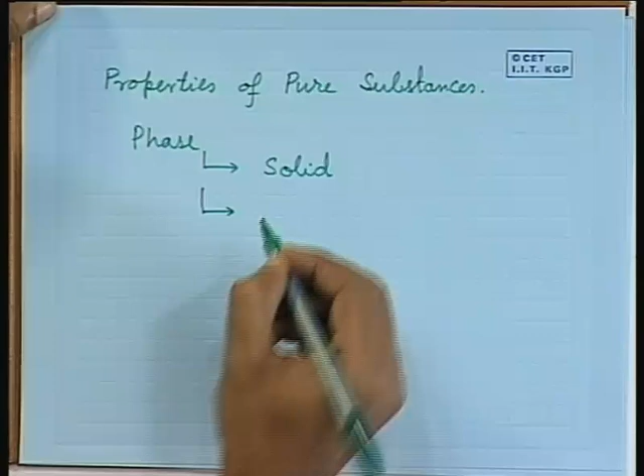it can be solid, it can be in liquid phase, it can be either in vapor or in gas phase. There is a subtle difference between vapor and gas phase, which we will know when we discuss further.

Now, out of this, particularly when we see the different engineering systems of our interest, we will find the working medium could be either in the liquid phase or in the vapor phase or gas phase, or it could be a mixture of liquid and vapor phase.

So, in engineering thermodynamics, or the branch of engineering thermodynamics which we are studying, we will be concerned with determining the thermodynamic properties of liquids, vapors and gases, and of course, the mixture of liquid and vapor.

There could be some properties of solid materials which are also thermodynamic properties, but we are not interested in that. Generally metallurgists or physicists discuss those properties. That is not within the discussion of the present course.

Now, let us take one example. Let us say we take certain vapor in a piston cylinder arrangement,

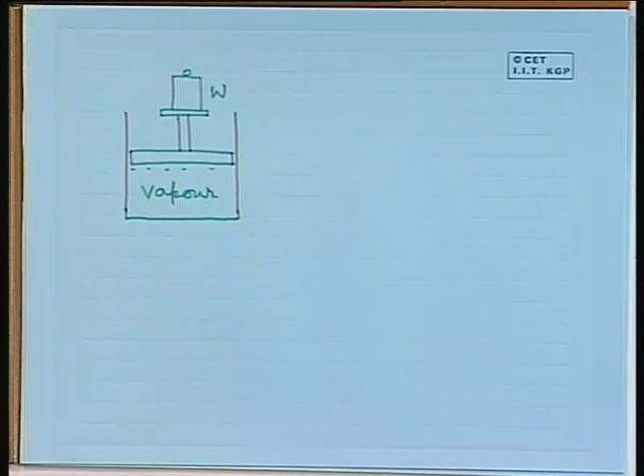Now, we are transferring heat to this vapor at a slow rate, so that at any instant the temperature of the vapor mass anywhere inside this piston cylinder arrangement is uniform and constant, but it is changing with time. That means, as we supply more and more heat, the temperature of the vapor mass as a whole is changing, but it is not changing from point to point.

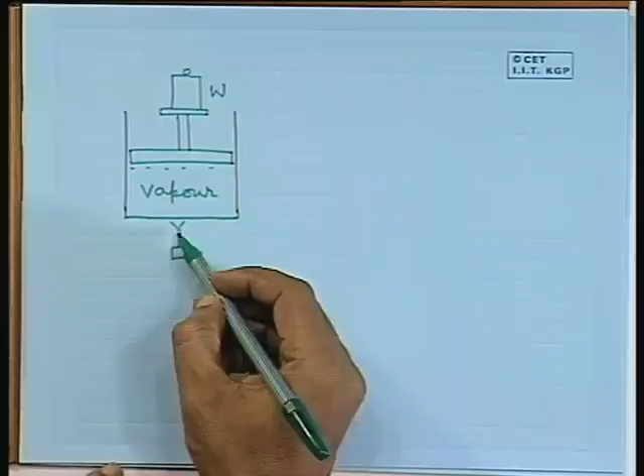Now, if we do this experiment and try to measure its different properties, what will we find? Obviously, if we transfer heat and there is expansion of this vapor mass, there will be change in volume. But we are applying a constant weight on the piston, so the pressure remains constant. So it is a constant pressure process, the volume changes and there could be change in temperature.

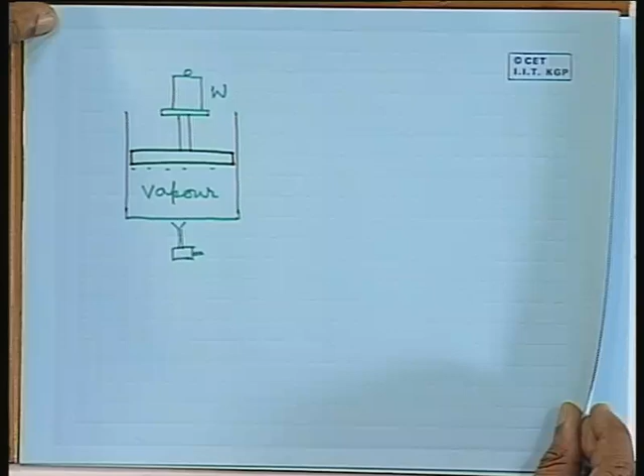Now, if we note down the change of volume, one can find out the change in volume with the application of heat. Similarly, one can think of a process

in which we are plotting the change of volume. Either we can think of specific volume or total volume, and on this side we have got pressure. So we can think of the change of pressure and volume while the temperature is kept constant. So the process will be something like this.

Let us say we are going for a cooling process. So the process will be something like this. Here what we have done, we have kept the temperature constant.

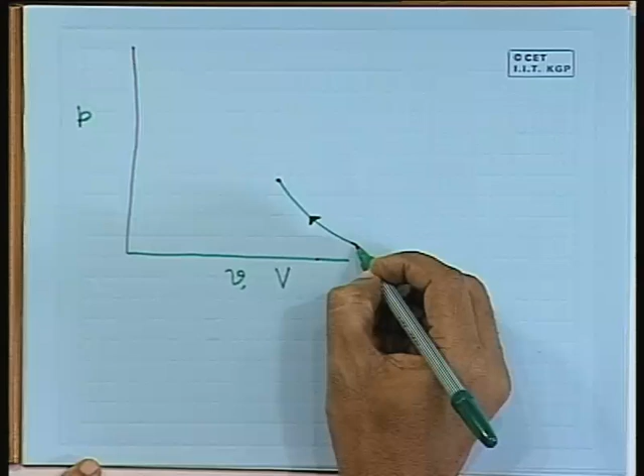At this point, let us say we are coming to the saturated state of the vapor. So we have started at any arbitrary pressure and volume and temperature of a vapor, then we are cooling it, that means extracting heat from the vapor mass, keeping the temperature constant, and then we are plotting the pressure and volume at different stages. So at one stage we will reach the saturated vapor condition.

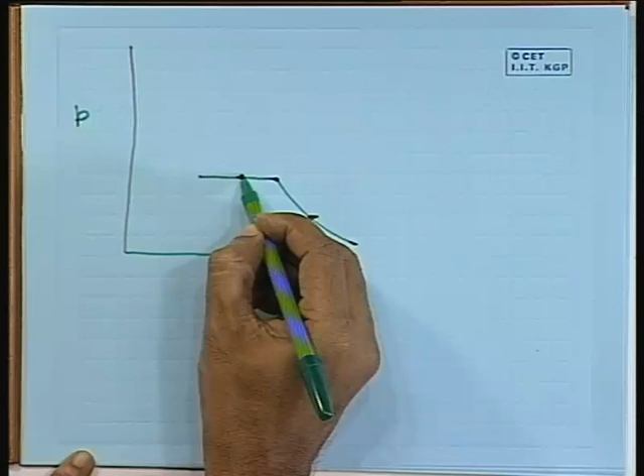After that, if we extract more heat, we will find that temperature will remain constant and pressure will also remain constant till this saturated vapor completely gets converted into saturated liquid. So at this point we are getting saturated liquid.

After this, if we extract more heat, we will find there is rise in pressure, but during this process there is very less change in volume. So obviously here we are having a liquid state, and in the liquid state we know it is almost incompressible. So the change in volume will be small.

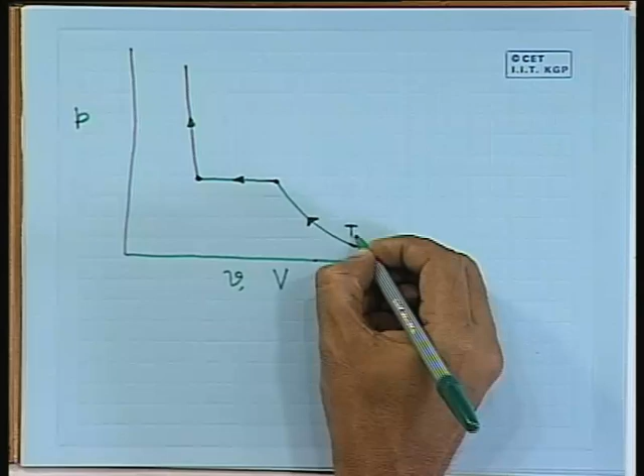So let us say this is at a temperature T1. We can repeat this process for another temperature and we will get something like this.

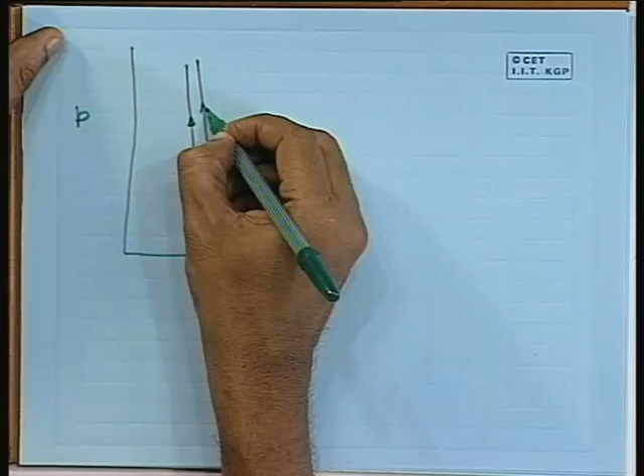So, that means we are getting basically three regions of the curve. In this region we are getting superheated vapor. This is the saturated vapor point. Here we are getting vapor liquid mixture. This is the saturated liquid point, and here we call it subcooled liquid. So this is liquid, this is vapor, and in between we have a zone where mixture of liquid and vapor exists.

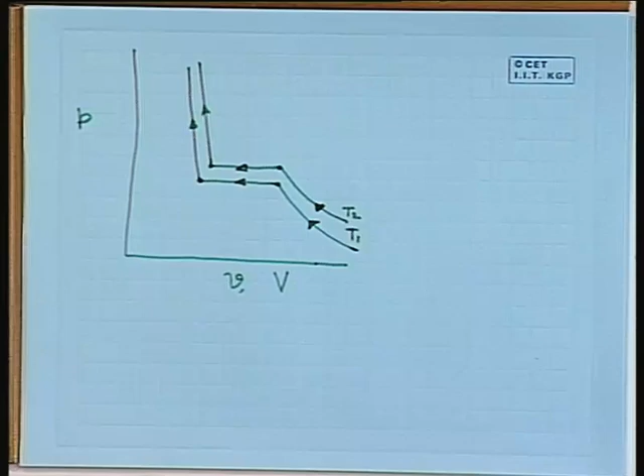Now, if we do this experiment for different temperatures, then we will have different points for saturated vapor. Similarly, we will have different points for saturated liquid. Now, if we combine all these points by some sort of a smooth curve, then you will get some sort of a dome like this.

Let us say this is the line which passes through points of all the saturated vapor, and this is the line which passes through all the points of saturated liquid. If they are extended, they will join at a particular point which is known as critical point. So this point let me denote as C.

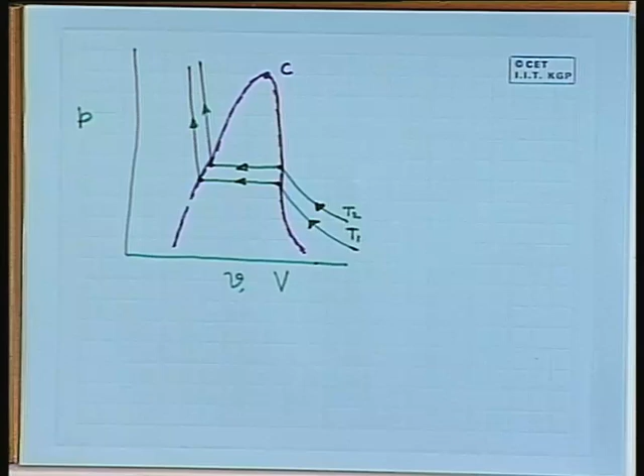or critical point. Now, if somebody does the same experiment or same type of curves are plotted, then through the critical point one will get a curve like this. And beyond critical point, the nature of the curve will be something like this.

So let me write down. This side we are having liquid, which is denoted by L. Inside the dome we are having liquid plus vapor, and this side we are having vapor. So L denotes liquid and V denotes vapor.

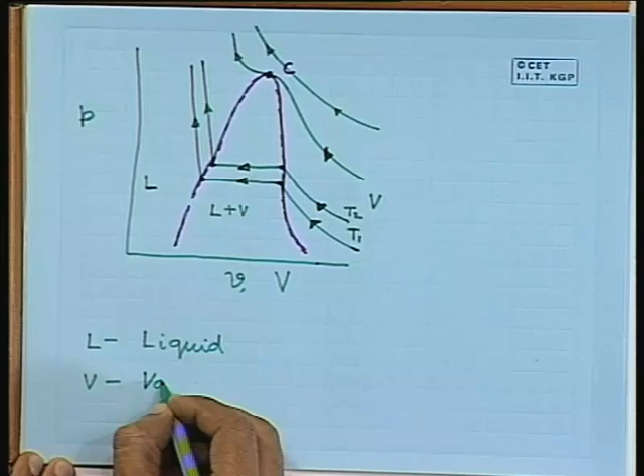These two, that means if we have the dome, on the left hand side of the dome and on the right hand side of the dome, we have got single phase regions, while inside the dome we have got a two phase region or mixture of two phases.

Now, for a pure substance, if it is in single phase, then if we know two independent thermodynamic properties, any third property can be determined.

All right. So in this region, or in the vapor region, if we know two independent thermodynamic properties, let us say if we know pressure and temperature, we can determine volume, we can determine enthalpy, we can determine entropy, or any other properties for that matter. Similarly, in the liquid region, if say pressure and temperature are known, other thermodynamic properties can be determined.

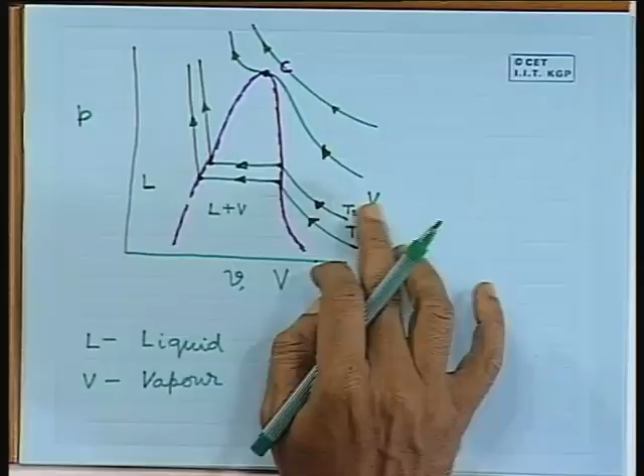Well, in the two phase region, we need any two independent properties for determining another thermodynamic property. So now we will see how to determine the thermodynamic properties and what are the important thermodynamic properties.

So mainly our working substance will be either in the gaseous phase or vapor phase, or it will be in the liquid phase, or it will be a mixture of liquid and vapor. And common working medium with which our engineering systems or engineering cycles run are like steam, it can be a refrigerant. So basically steam is used in a number of engineering cycles, and it is a medium which is extensively used for the production of power.

So we will study the properties of pure substance with reference to properties of steam. So for steam, the diagram which I have shown you is known as the PV diagram for steam. This is the PV diagram.

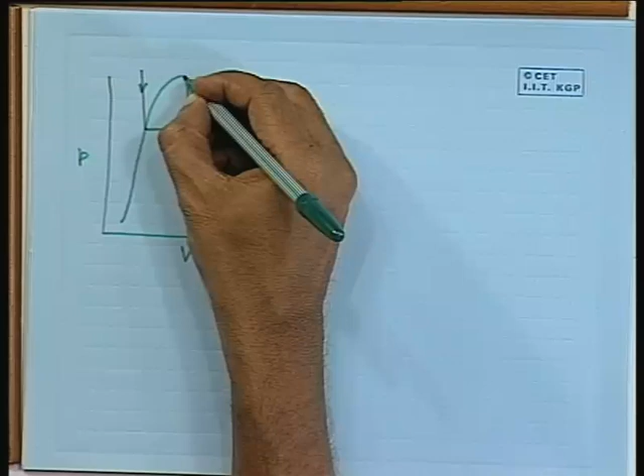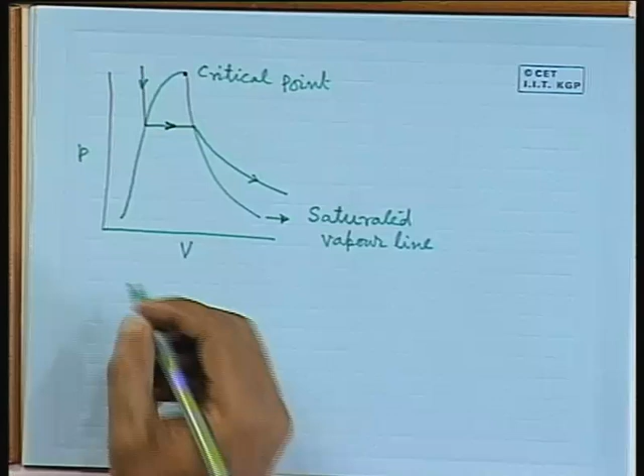So here these are constant temperature lines. So this is a constant temperature heating line. Earlier I have shown a constant temperature cooling line. This point is known as critical point. This line is known as the saturated vapor line, and this line is known as the saturated liquid line.

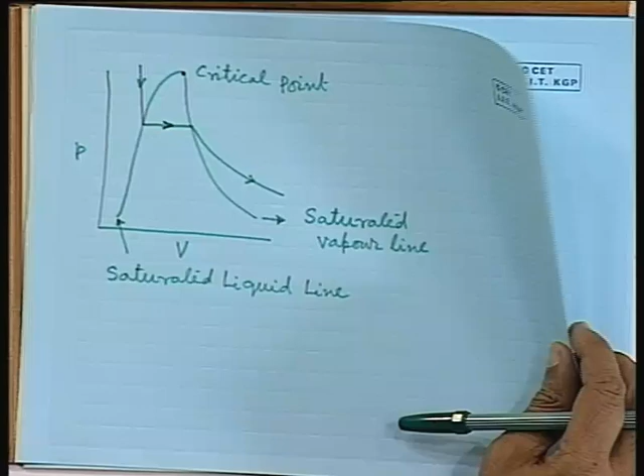Similarly, one can have another thermodynamic plane for representing the pure substance. This is a TS plane, or temperature entropy plane.

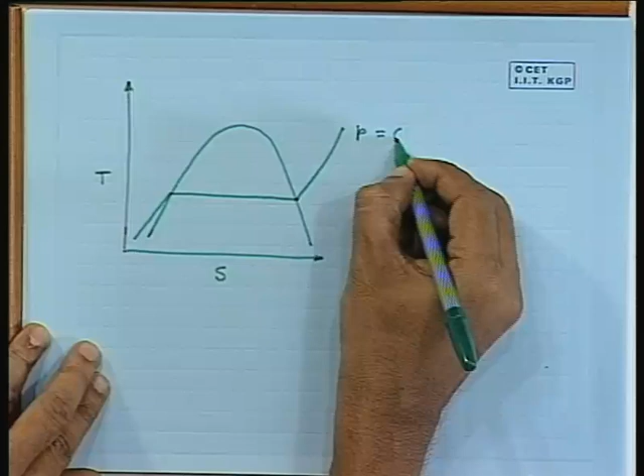In this temperature entropy plane, we can have constant pressure lines like this. So this is a constant pressure line, so we can call it P is equal to constant. Another line we can have, let us say this is P1 is constant, where P1 is greater than P.

Here also we are having the critical point here at the top of the dome. C is the critical point.

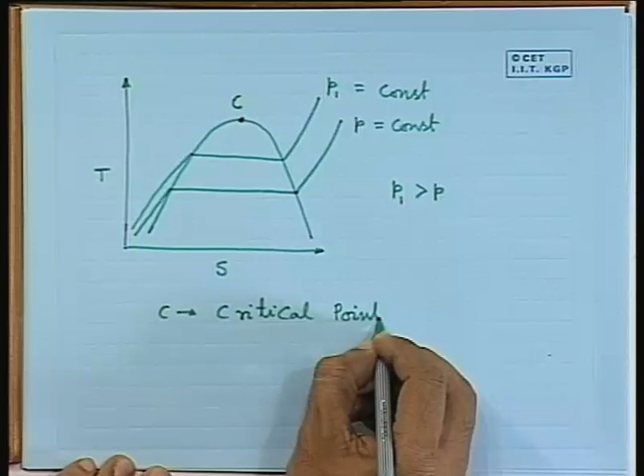Then if I have these two lines, A to C, or line AC, this is the saturated liquid line, and BC is the saturated vapor line.

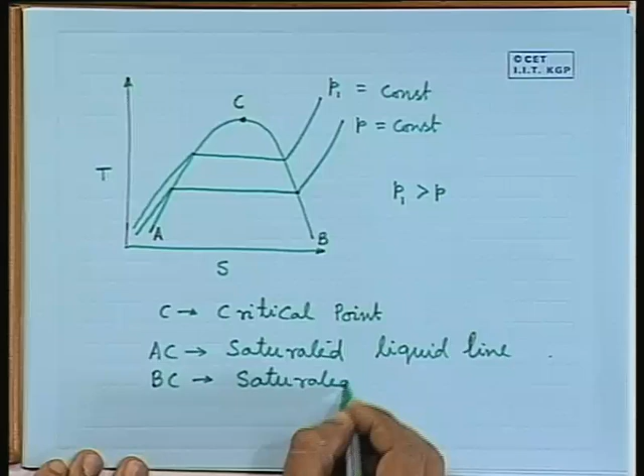Again, here we can see a dome type structure within which there is both liquid plus vapor. On the left hand side of the dome we have got liquid, and on the right hand side of the dome we have got vapor.

At the critical point, one cannot make any demarcation between the liquid phase and the vapor phase, and at the top of the critical point we have got gaseous phase of the matter. So this holds good for both PV diagram and for the TS diagram. That means, at the critical point we do not have any demarcation between liquid phase and vapor phase, and above the critical point we have got gaseous phase.

As mentioned, for any pure substance in a single phase, we need two independent properties for determining the third property or any other thermodynamic property. Inside this dome we have a mixture. Though it is a pure substance, here two different phases exist together, liquid and vapor. So here we need one additional piece of information for determining the property values. That information is known as quality or dryness fraction.

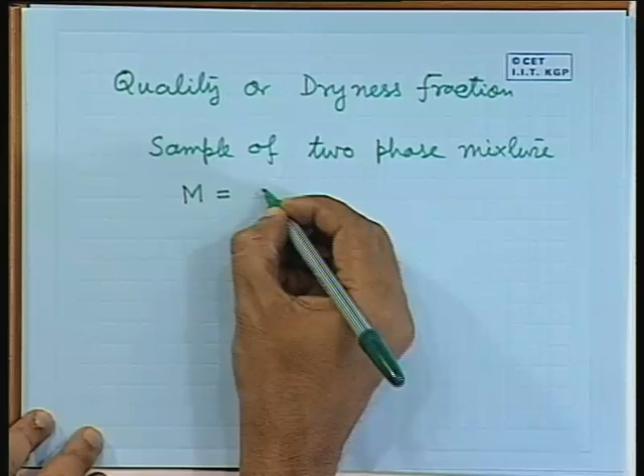Let us take a sample of a two phase mixture. The mass of the sample is m. As it is a mixture of two phases, it is made up partly of liquid and partly of vapor. Conventionally, liquid is expressed with a subscript f and vapor is denoted with a subscript g. So m total equals mf plus mg.

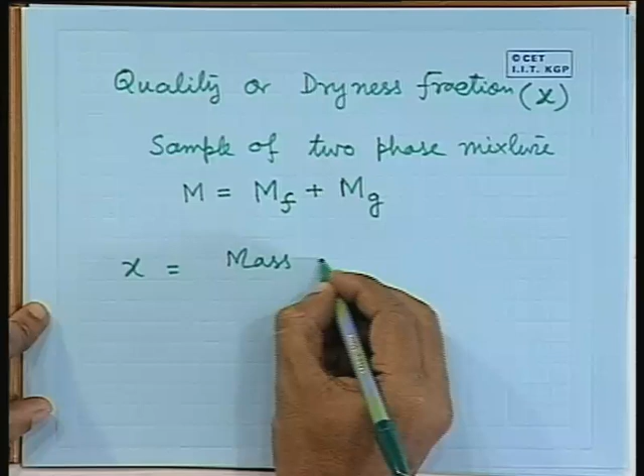Now, quality or dryness fraction is denoted as x. So x is mass of vapor divided by mass of the sample. In this case, it will be mg by m, or mg by mf plus mg.

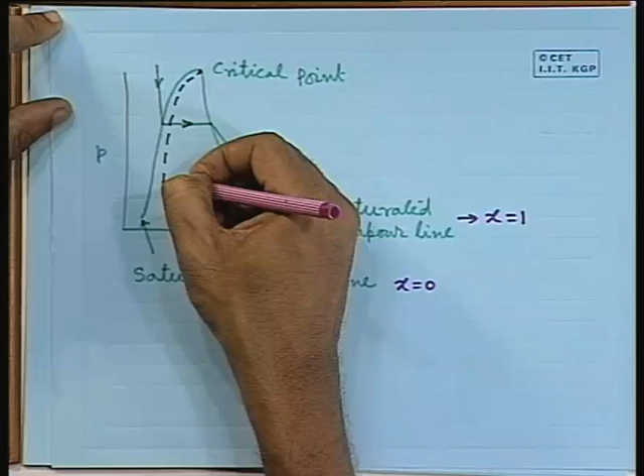This quality or dryness fraction will be used as another property inside the two phase dome. If we go back to our earlier diagram, at the saturated vapor line x is equal to 1, at the saturated liquid line x is equal to 0, and in between values of x lie between these two lines. In other words, we will have different curves for different values of x inside the dome. These are constant x values or constant x lines, so we can write x is equal to constant.

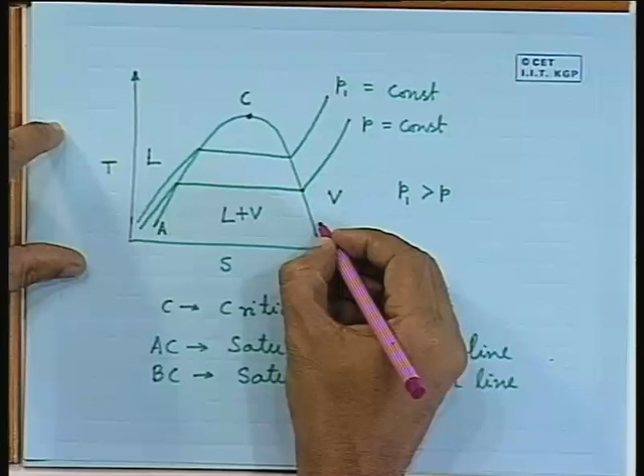A similar thing exists on this TS diagram. X is equal to 1 here, x is equal to 0 here, and in between there are a number of lines. Let us say this is one typical line where x is equal to constant.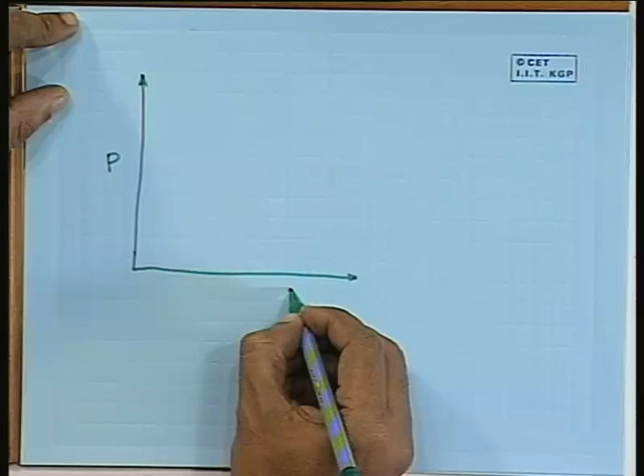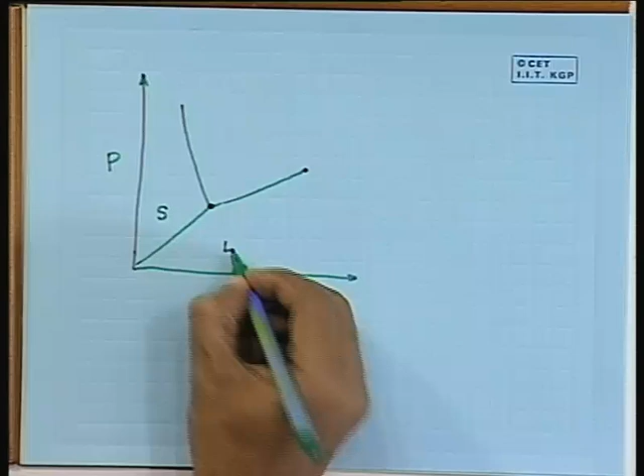Though, as mentioned at the beginning, we are not much concerned with the properties of solids, let us see the total scenario on a PT diagram, pressure temperature diagram. This is a PT plane for any thermodynamic substance. Transformation of phases can be denoted by lines like this. This side we will have solid, this is liquid, this is vapor, and this is gas. This is extended, so if we give different names, this point is C and this is Tp.

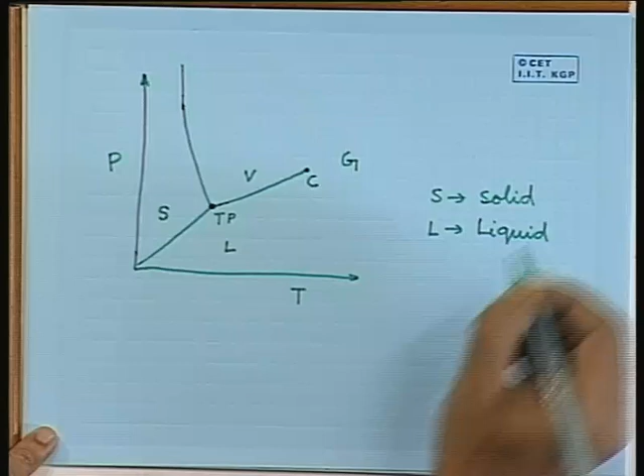S denotes solid, L denotes liquid, V denotes vapor, and G denotes gas. C denotes critical point. Tp denotes triple point.

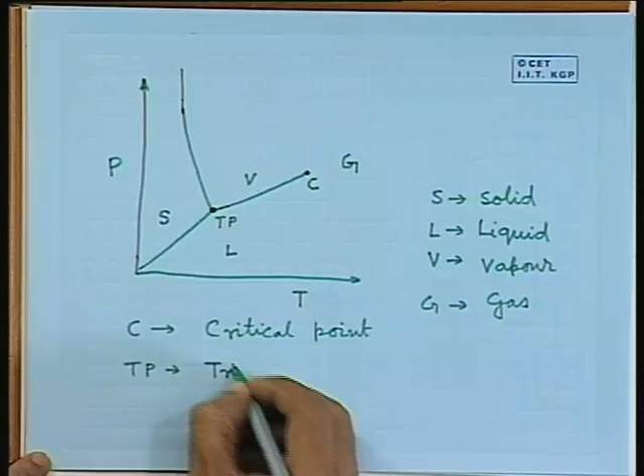Now, this is a very important diagram. It shows, depending on the values of pressure and temperature, what will be the phase of a particular substance, whether it will be in solid phase, liquid phase, vapor, or gaseous phase.

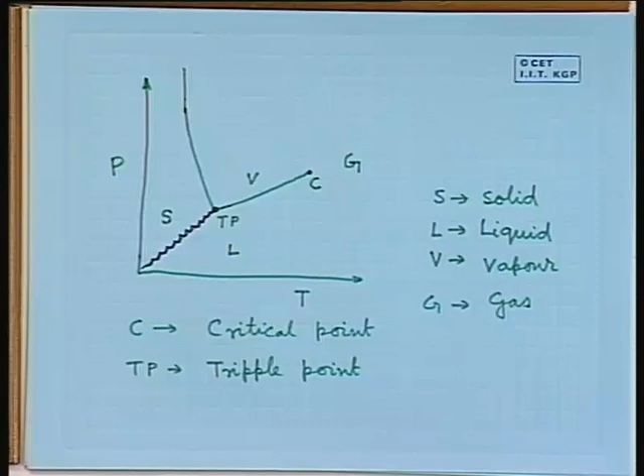This line indicates transformation between solid and liquid, so it indicates either melting process or solidification process. This line indicates transformation between solid and vapor, so this is indicative of sublimation and desublimation process. And this line indicates transformation between liquid and vapor, so it is boiling and condensation.

And here we can see the critical point, beyond which or at which there is no physical demarcation between the liquid phase and the vapor phase.

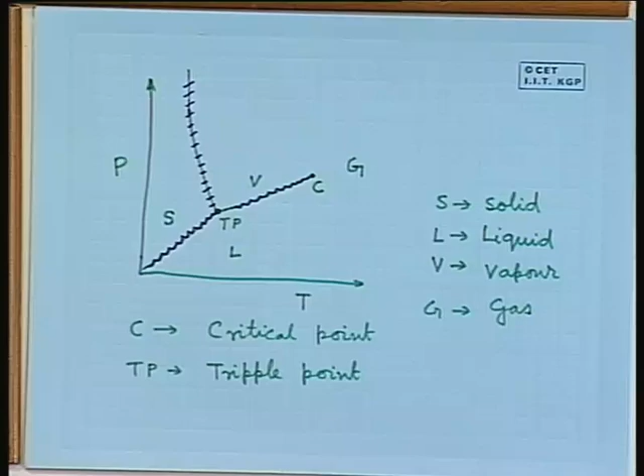In between there is a point which is known as the triple point. It is a very important point, and at this pressure and temperature all three phases can coexist. So these lines show the coexistence of two phases, but this point shows coexistence of three phases. All three phases can coexist at the triple point.

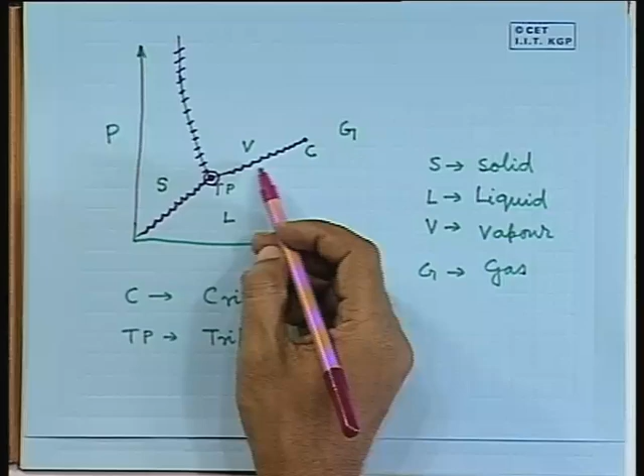So this is for general information, but for the branch of engineering thermodynamics we are interested in, this line only, where transformation between vapor phase and liquid phase is taking place. Let us recapitulate once again what we have learnt so far, and then we will go for determination of different properties.

We have seen that a pure substance can remain in different phases like solid, liquid and gas or vapor. As far as engineering thermodynamics is concerned, we are interested in liquid phase and vapor phase, and sometimes in gaseous phase. When there is transformation between liquid to vapor phase and vapor to liquid phase, those processes can be expressed on different thermodynamic planes. Two thermodynamic planes I have shown: one is a PV plane and another is a TS plane.

In all these planes we can see that there are three regions: one is a liquid region, another is a mixture of vapor and liquid region, and the third is the vapor region. The liquid and vapor mixture region is bounded by two lines. On one side we have the saturated liquid line, on the other side the saturated vapor line. These two lines intersect at one point known as the critical point. At the critical point there is no demarcation between liquid and vapor, and above the critical point we have the gaseous phase.

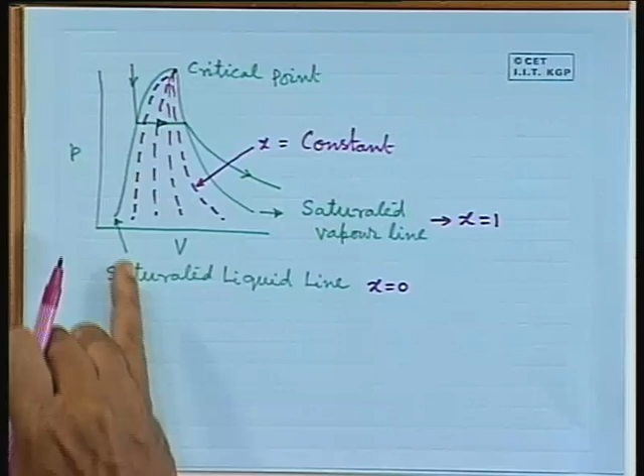There is another important piece of information: inside the two phase region we need another property for determining any thermodynamic property of the mixture, and that property is generally the dryness fraction or quality.

By definition, this is the ratio of the mass of vapor divided by the total mass.

Now let me draw the thermodynamic plane which we generally use for discussing the change between the liquid phase and vapor phase. One is the PV plane, as I have shown. This is the PV plane. Another is the TS plane.

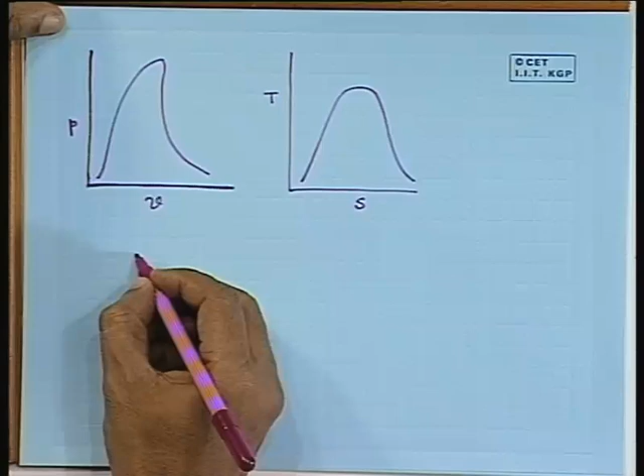The third one is the HS plane. So the HS plane looks like this. In the HS plane also we have the critical point, this is critical point C, and of course you will have different values of x like this. This is x equal to constant, and this line is your saturated vapor line.

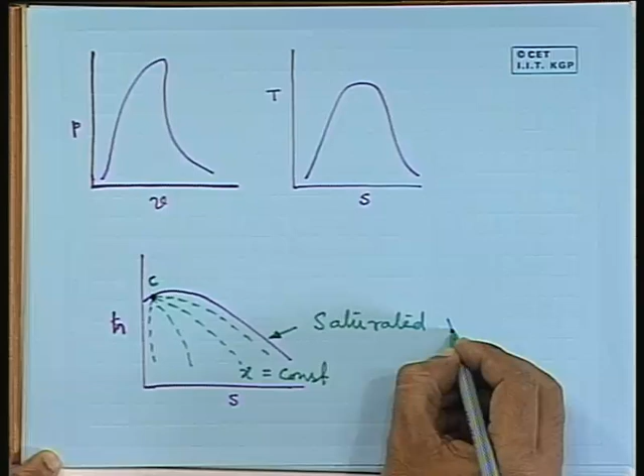This HS diagram, where enthalpy and entropy are taken as the coordinates, has another name - it is known as the Mollier diagram, or sometimes called the Mollier chart. This diagram is very useful in solving problems because directly one can get the enthalpy values and changes in entropy in different processes from this chart. One can read directly.

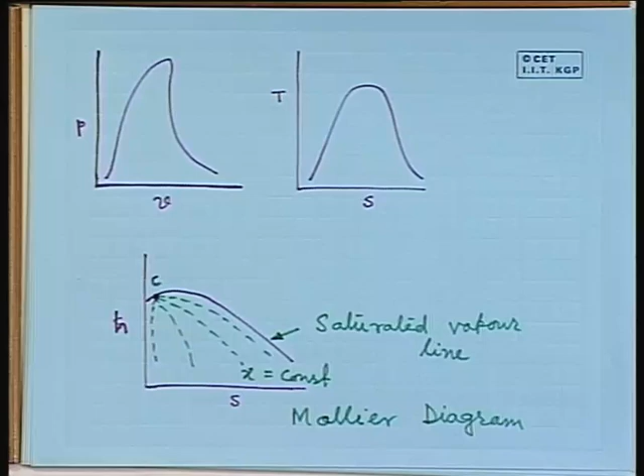In different steady state, steady flow processes, change of enthalpy is a very important quantity and it has to be computed a number of times. So this Mollier chart is very handy in calculating problems and representing different thermodynamic cycles. Other planes are also possible, like in refrigeration cycles we can use a different thermodynamic plane, but those we will discuss later on. So mainly for steam properties or for processes involving steam, we use to represent the process either a PV diagram, a TS diagram, or an HS diagram.

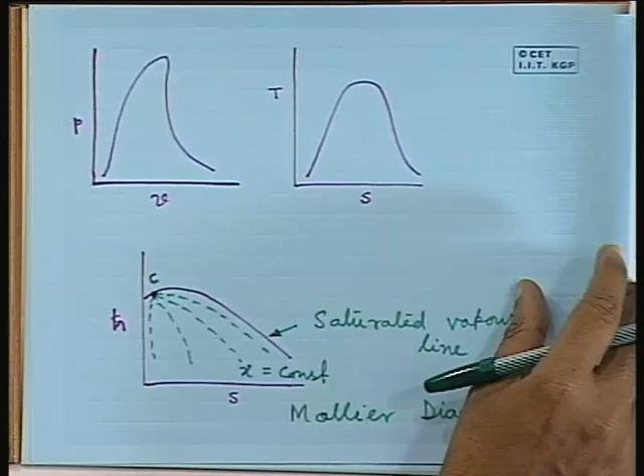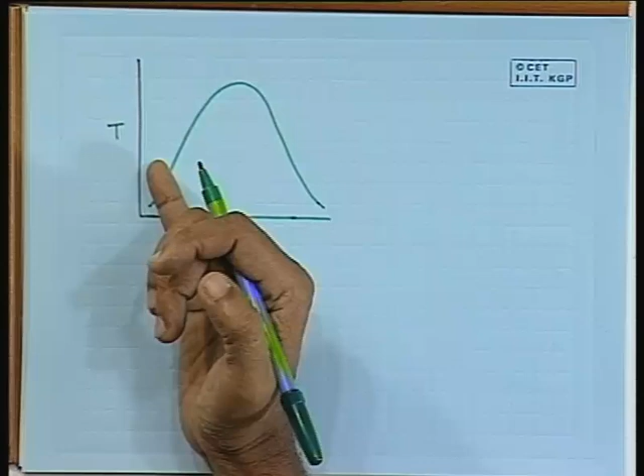Now, which properties are we interested in? Let us say we will be interested in the specific volume. So what is the specific volume? If we think of any thermodynamic plane, let us say we are interested in the TS plane, and in this TS plane we want to represent a process. The endpoints of the process can be anywhere - either in the liquid region, or in the two phase region, or in the vapor region. Accordingly, we have to determine the properties in those regions. Let us say we are interested in one property which is specific volume.

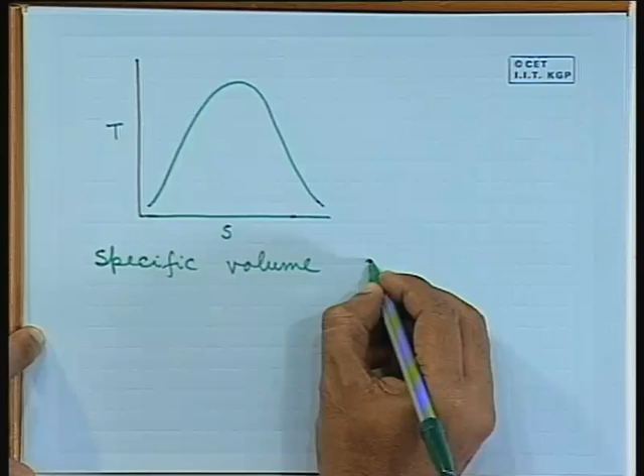V. So if it is in the superheated vapor region, then we can determine it knowing two other properties like pressure and temperature. Similarly, if it is in the liquid region, we can determine it knowing two independent properties - let us say again we take pressure and temperature. These two properties are easily measurable, so from there we can determine the specific volume.

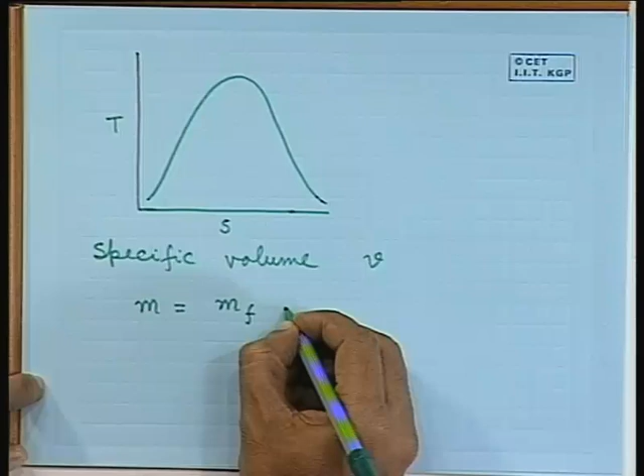But inside the two phase dome, what should we do? We can proceed like this. If we make the mass balance: M sample equals M liquid plus M vapor. V sample, the total volume of the sample, equals V liquid plus V vapor.

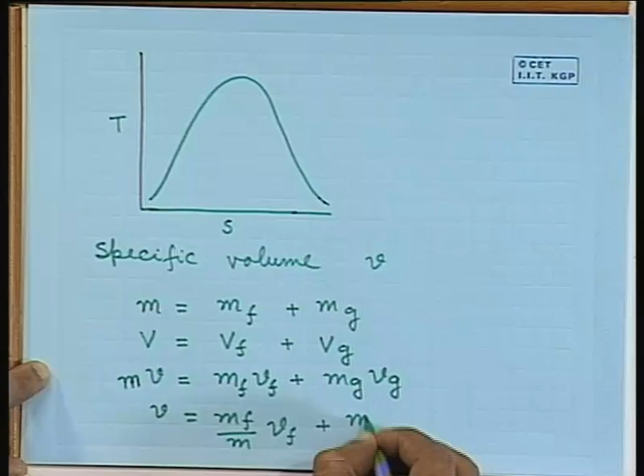Then one can write M into V - what is this quantity? This is the specific volume multiplied by mass, which gives the total volume. So that could be written as Mf into Vf plus Mg into Vg, and then we can divide both sides by m. So it will be mf by m into Vf plus mg by m into Vg.

So basically, we are getting the specific volume of the mixture is equal to mf by m multiplied by Vf plus mg by m multiplied by Vg. By definition, the second term in this quantity is the dryness fraction, or X.

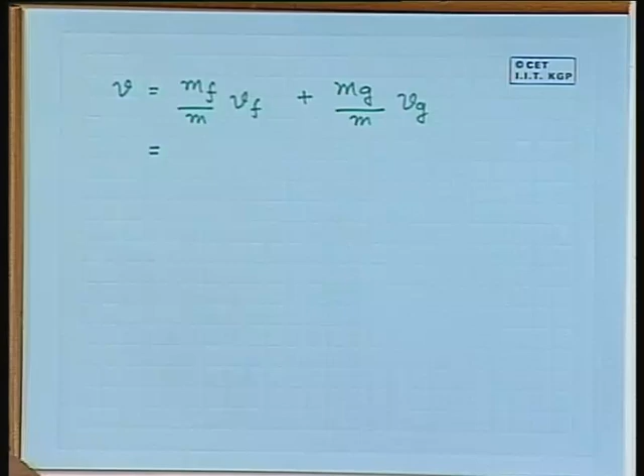Similarly, here we can get what is mf. M minus Mg, that is your mf divided by m into Vf plus Mg by m into Vg. So this will be 1 minus X into Vf plus X into Vg.

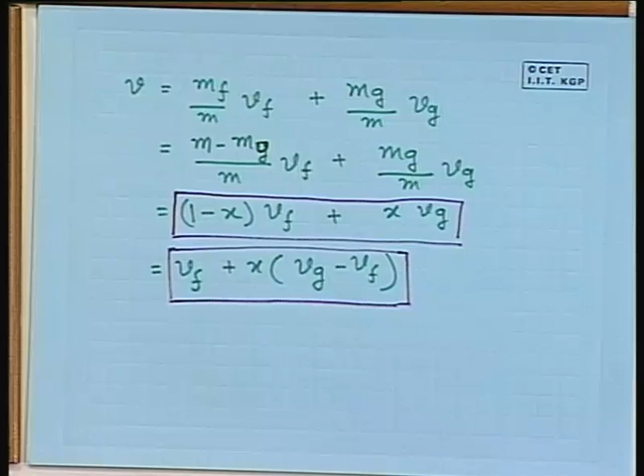One can simplify it slightly. So one can write Vf plus X times Vg minus Vf. So here either of these two expressions can be used for denoting the specific volume of the mixture.

So what do we need for determining the specific volume of the mixture? We need the specific volume of the fluid and we need the specific volume of the gas or vapor, and at the same time we need the mass fraction of any of this component, or we need the quality or dryness fraction. If we go back to this diagram...

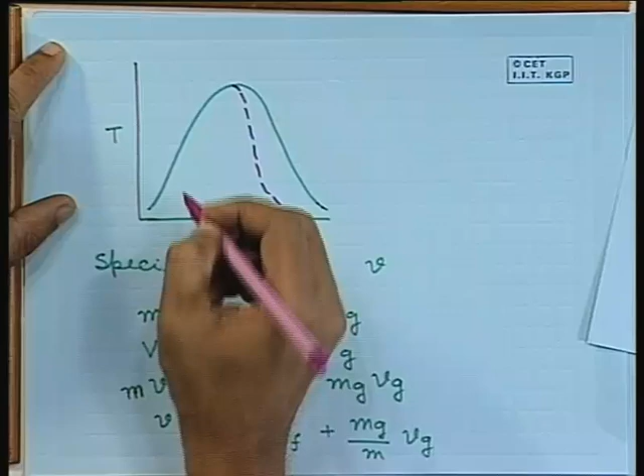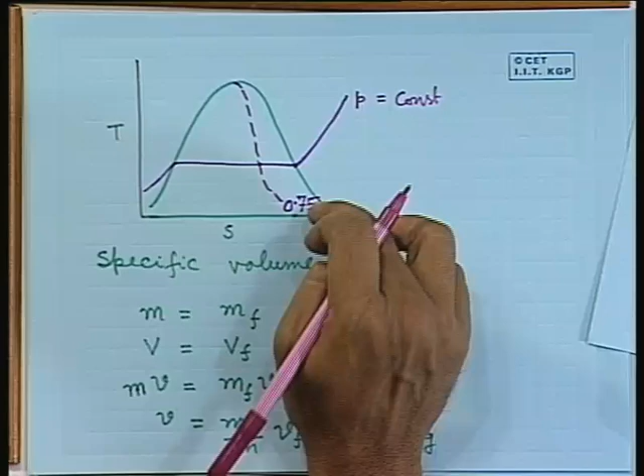Let us say this is a constant pressure line, and we are interested at this pressure. Let us say this is a constant dryness fraction line, and this dryness fraction is 0.75. So we are interested at P bar and at dryness fraction equal to 0.75, to determine what is the specific volume of the mixture.

So what do we have to determine? First we have to know what is Vf. That Vf corresponds to this value of the saturated liquid. We have to know Vg, which corresponds to the specific volume of the saturated vapor at P bar, and already it is specified that we have to determine it at X equal to 0.75.

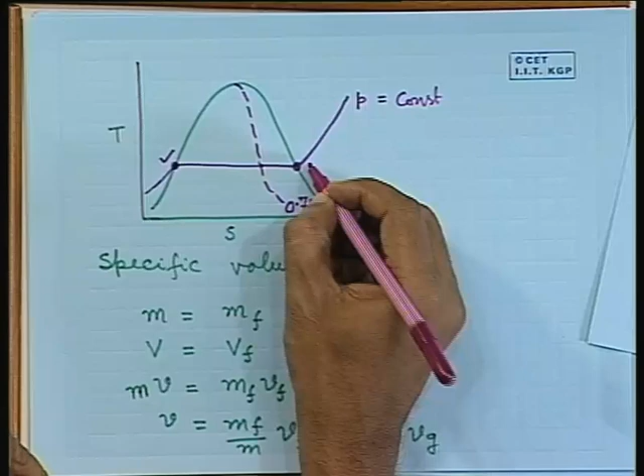So we know the magnitude of this quantity Vf here, we know the value of Vg here, we know the value of X here. So that can be plugged into this equation, and ultimately we can find out the specific volume of the mixture.

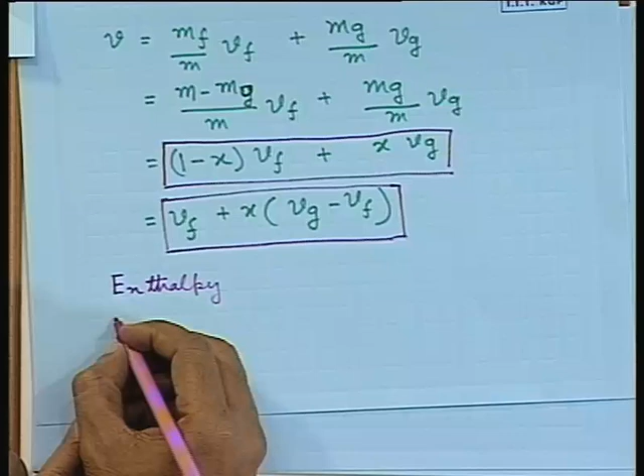This holds good for any other property. Like if we want to determine enthalpy, we can use a similar type of additive formula. If we are interested to determine entropy, we can use a similar type of expression.

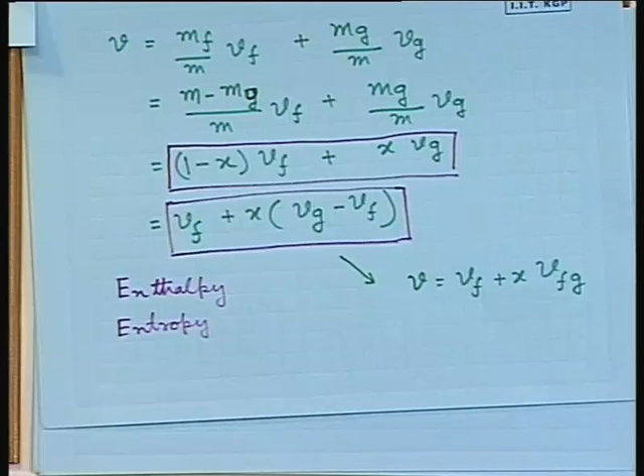Sometimes, instead of using Vg minus Vf, their difference is used, and then this expression is like: V is equal to Vf plus x Vfg, that means the difference between Vg and Vf. So this expression is also used in some occasions.

Now, for determining the steam properties, we use steam table. This is a very useful tool. Steam table is a very useful tool for thermodynamic calculations, where steam is the working substance, or steam and water are the working substances.

Now, steam table, there are different steam tables available in the market. We can use them, and the only thing is that we need to know how to read the steam table. Steam table mainly has different parts. So in the first part of the steam table, we will see the property of saturated steam or saturated vapor and saturated liquid, that will be given in the first part.

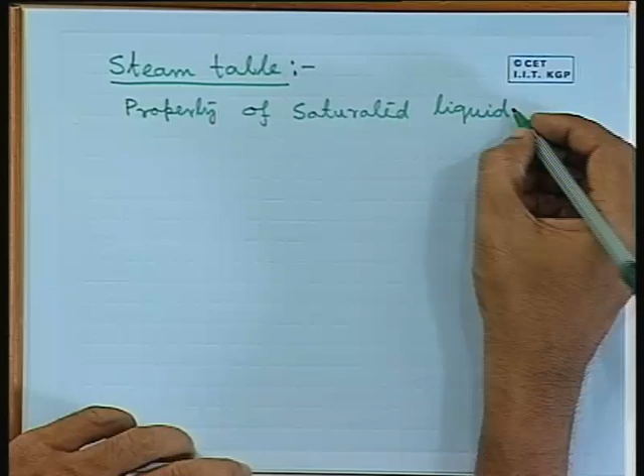Property of saturated liquid, that will be given in the first part of the steam table - saturated liquid and vapor. So basically we can say that property of saturated fluid will be given in the first part of the steam table. Which are the properties that will be given? Here properties like pressure, temperature, specific volume, enthalpy, and entropy will be given.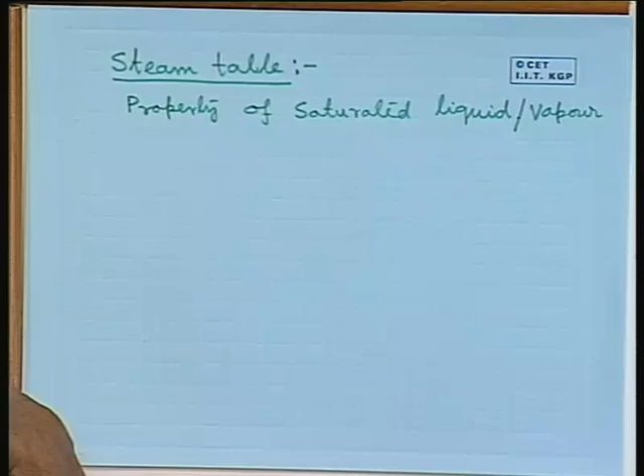Now, steam table - either the properties are tabulated based on pressure, or it can be tabulated based on temperature. So in most steam tables, we will find both: tables based on pressure, or pressure-based tables, and tables based on temperature, or temperature-based tables.

So if there is a table which is temperature based, the property values will be given at regular intervals of temperature, and temperature in the steam table denotes the saturation temperature. If we give the saturation temperature from any of these diagrams, either the PV diagram or the TS diagram - so in this PV diagram I have shown a constant temperature curve.

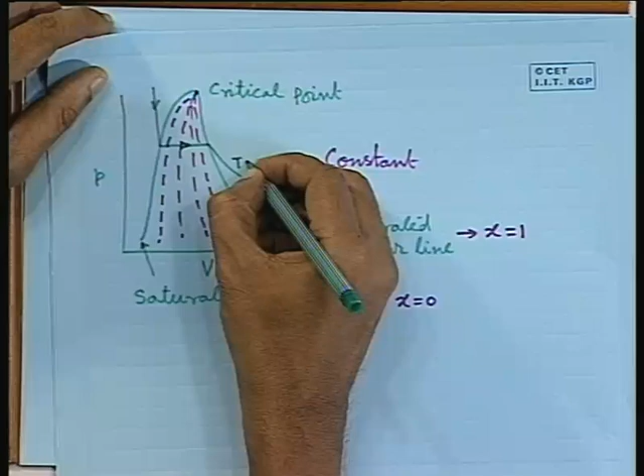Let us say T is constant here for this green curve. If T is constant within this two phase zone, P is also constant. That means, if I specify the temperature and call it the saturation temperature, the saturation pressure becomes fixed, because we are determining the property at the saturated state, either for the saturated vapor or the saturated liquid. Similarly in this other curve, P is constant, but in the two phase zone T is also constant. So if I specify the pressure, temperature remains constant, because we are determining properties at saturated condition.

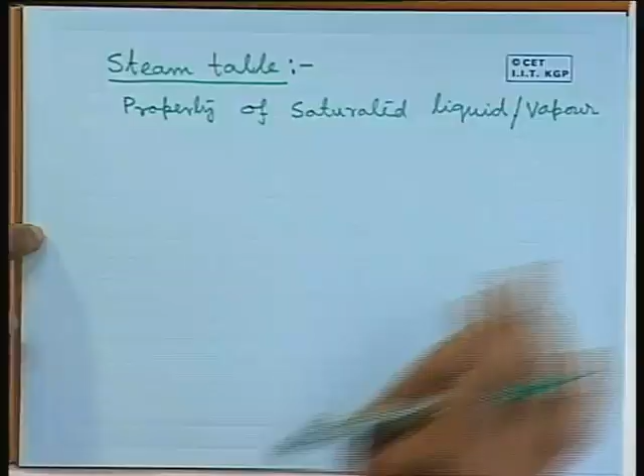So a pressure based table or a temperature based table, let us think of a temperature based table. A temperature based table will be something like this. We will have temperature, then pressure, then Vf, that is the specific volume of the liquid. We can have Vg, and Vfg also in some tables.

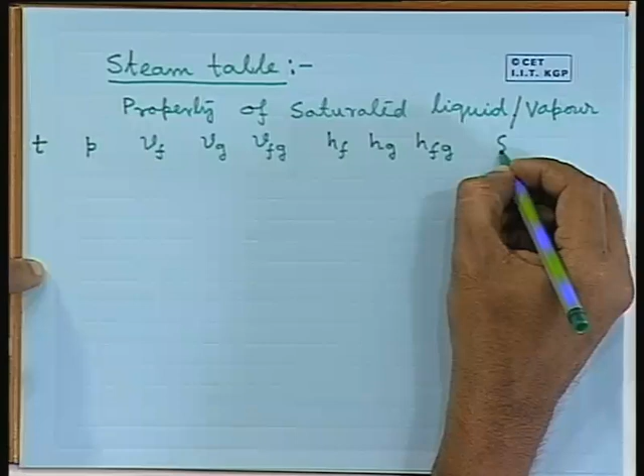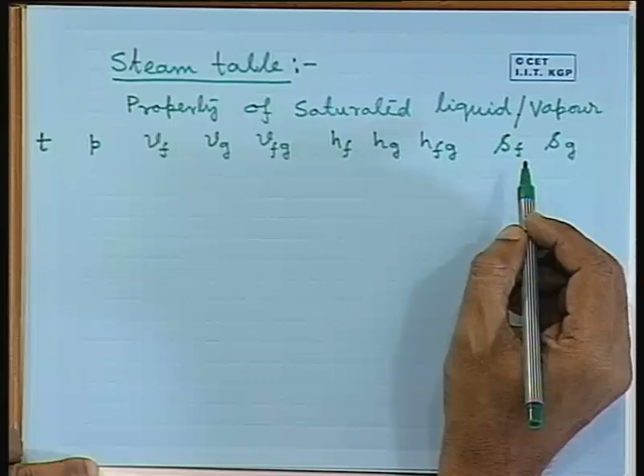Then we can have Hf, Hg, Hfg, Sf and Sg. So this is temperature, this is pressure, this is specific volume for saturated liquid, this is specific volume for saturated vapor, this is the difference of specific volumes for saturated vapor and liquid, this is enthalpy of the liquid at saturated condition, this is enthalpy of the vapor at saturated condition, and it is the difference between these two quantities. Then this is the entropy of the saturated liquid, and this is the entropy of the saturated vapor.

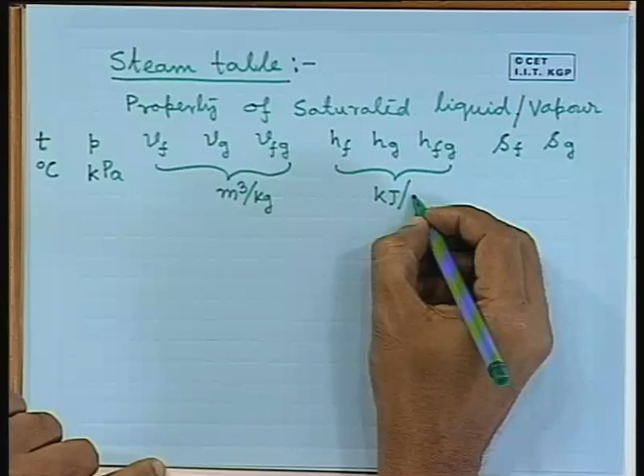Now, the units which are used, we use SI units. So one can have degree Celsius for temperature, pressure we can have in kilopascal. All these three specific volume quantities can have a unit of meter cube per kg. All these three enthalpies can have a unit of kilojoule per kg, this is specific quantity per unit mass, and these two entropies will have kilojoule per kg Kelvin. So these are the units which will be used in the steam table.

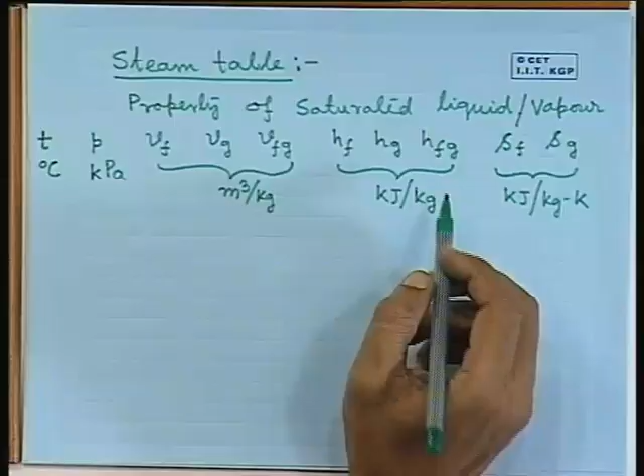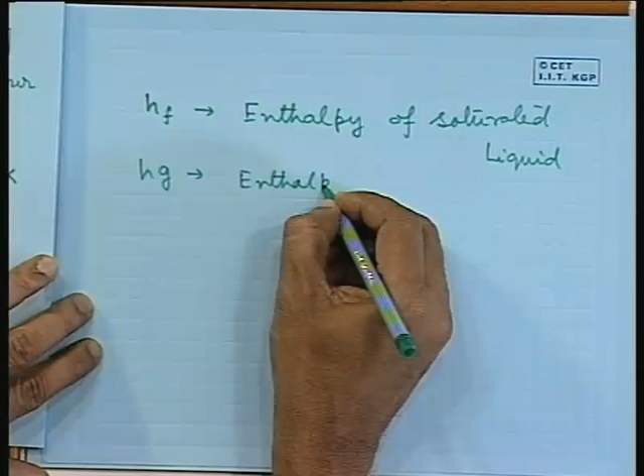Here, it is interesting to note that we are determining the quantity HFG. This quantity has got a physical meaning, and from the physics point of view it is one quantity of interest. What is this quantity? Hf is the enthalpy of saturated liquid. Hg is the enthalpy of saturated vapor. So HFG is basically Hg minus Hf.

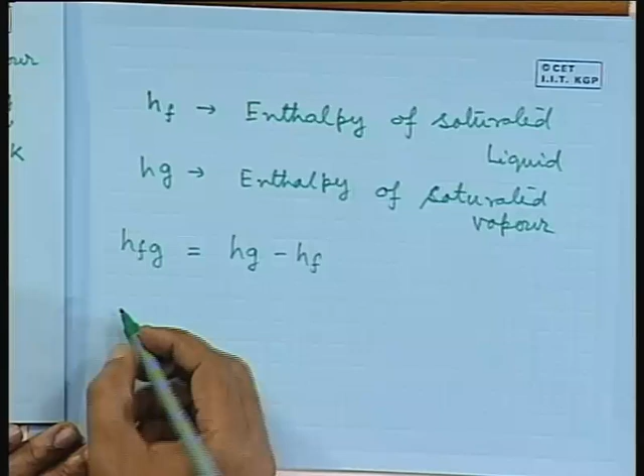That means this is the difference between the enthalpy of the saturated vapor and the saturated liquid, or in other words, we can write Hf plus Hfg equals Hg. So this is the enthalpy of the saturated liquid. It needs some more enthalpy to get converted into saturated vapor at the same pressure and temperature. What is this quantity? This quantity is the latent heat of vaporization, or latent heat of condensation, whichever process we consider. So HFG has got a physical meaning that it is the latent heat of vaporization.

So these are the quantities which we can read directly from the steam table, and this is a temperature based tabulation of the steam table. Similarly, one can have a pressure based tabulation. In that case, we will have P to start with, and property values will be tabulated at regular intervals of P, followed by T. Corresponding to this pressure, the saturation temperature will be tabulated here.

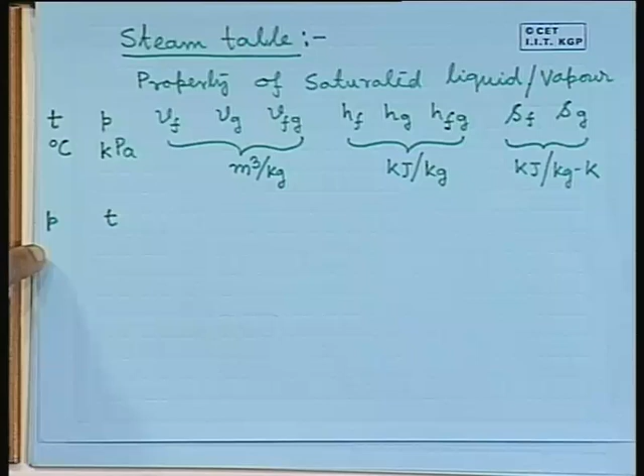So what is the difference between these two tables? Here we will see a regular interval of temperature, but pressure intervals will not be regular. Whereas in the second case, we will have a regular interval of pressure, and corresponding saturation temperatures will be tabulated in the next column, but the temperature intervals will not be regular. So that is the only difference between these two tabulations of the steam table.

Next, what we will do, I will take some example and explain how the data are tabulated and what we can do with the help of this data. So we will continue in our next class.